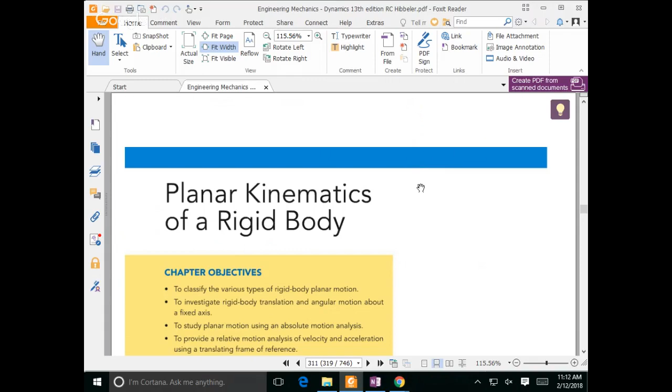But we also had that section a bit ago in the end of the other chapter where it talks about RB, the position of point B, is equal to the position of point B relative to A, plus the position of A. And if you just look at a vector diagram, you see that. You see RA and RB relative to A. This is kind of the focal point right here.

Now, I know it has a weird subscript there, but there's a reason behind that. And the way they've set it up is kind of nice because the subscripts could be canceled out. So this is kind of not necessarily dummy proof, but it's easy to make your way through this. But in addition, something very strange happens to this. The title of this section had the word rigid body involved in it.

And if this little blue object here is a rigid body, I mean most of the time it won't really be a blue object, it'll be something like a connecting rod in a car, like a big piece of metal here, in which this might be A and this might be B, or any sort of object. If it's rigid, then the distance between A and B doesn't change. Hopefully, if it did change, that means your thing broke and you've got a problem. If it didn't, then there's something very interesting you see if you're sitting on A.

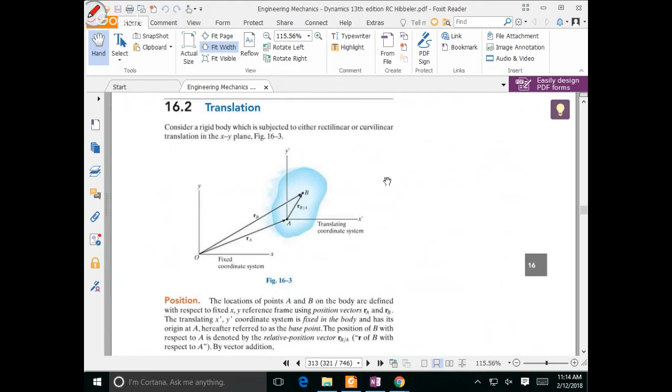So this RB relative to A means, he showed this before, where there's a person sitting on A looking at B. The only thing that person sees is the possibility of either one, it rotating around you, or two, it just sits and goes in what he calls translation. So the object might look like this.

A few seconds later, well, outside of the fact that my drawing looks strange, basically you're sitting here and you're looking at that point, you don't see any change. The only other thing that can happen is you're sitting there looking at it and the thing moved. And from this perspective, it appears as though it's rotating.

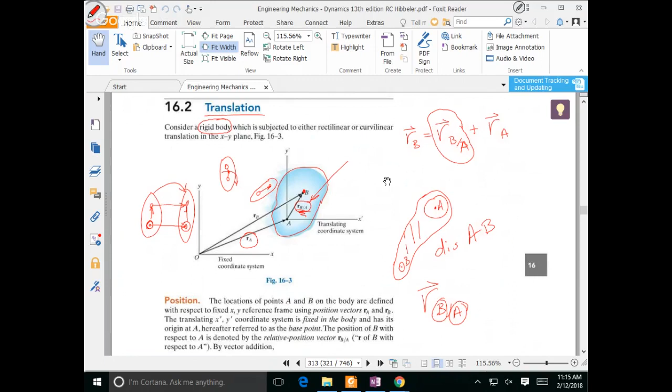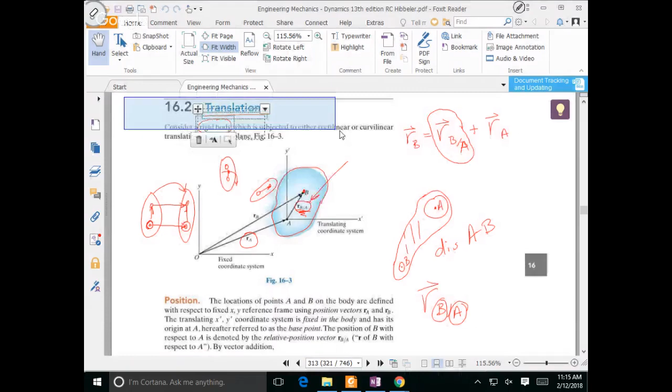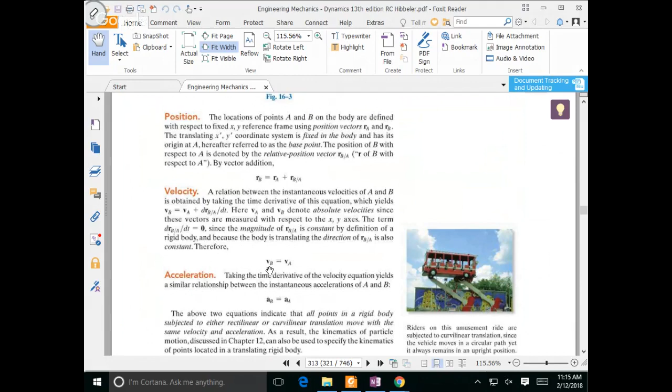And that's it, there's nothing more to it. So it's essentially this concept of translation. He spends a little extra time here, and maybe he shouldn't, but he talks about translation - if it's just purely translating, moving from left to right or right to left, then the velocity and acceleration of each point are the same. There's no difference between them.

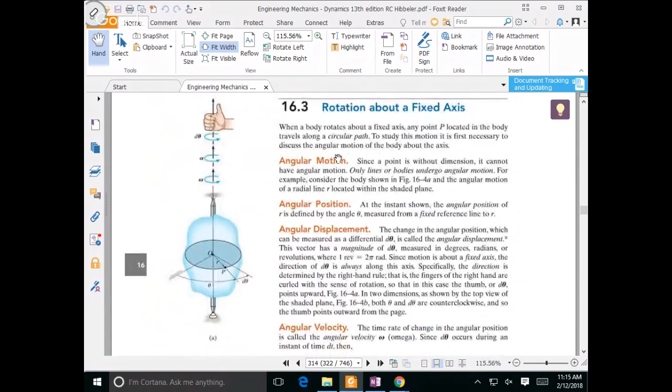However, then he talks about the second thing, and that is rotation about a fixed axis. He sort of diverts your attention a little bit - maybe he shouldn't, but he starts with this, and notice that's the right hand rule, it rotates in that direction. Actually this one should be listed first. The omega is the same thing as theta dot, and the alpha is the same thing as theta double dot. There's no difference between those at all, so absolutely nothing there that's different.

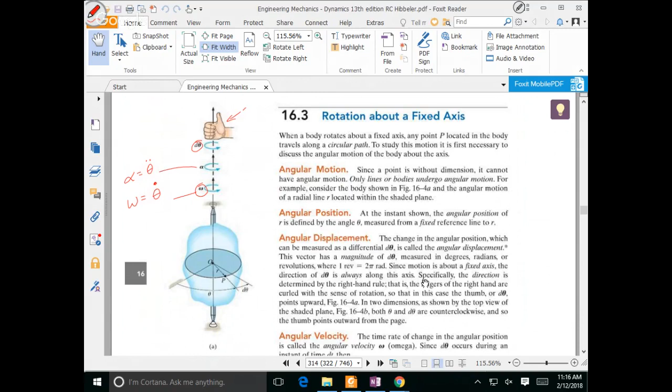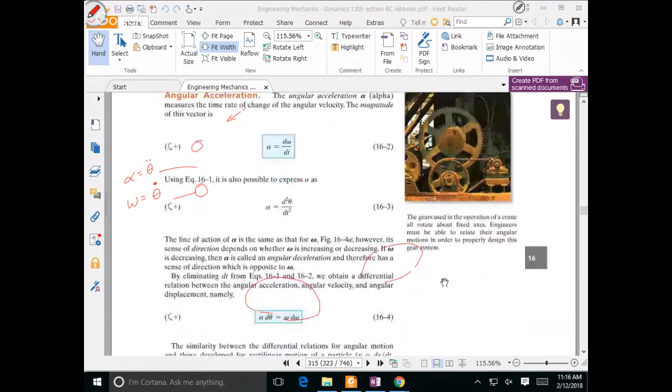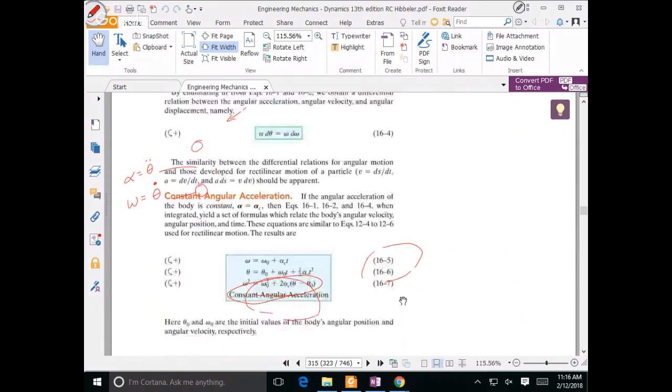You go down and he identifies those, he identifies the other one right over here. Eventually he looks at this other equation, which is rarely used, but he might put a problem in the back of the book using it. Then he starts talking about constant angular acceleration there, and that's kind of a byproduct of stuff you've already seen.

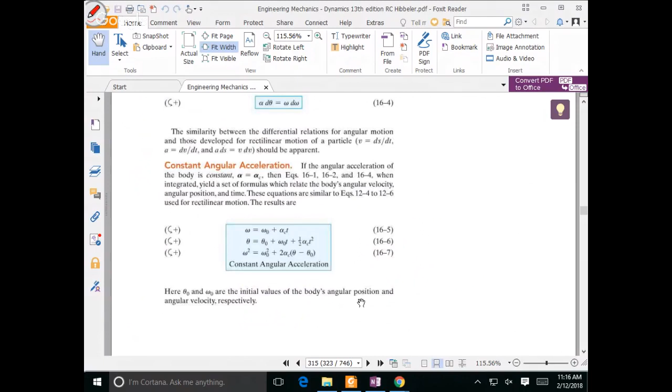You've got to think about it like this, okay? And here, I'll do it this way, just so it's saved in the notes.

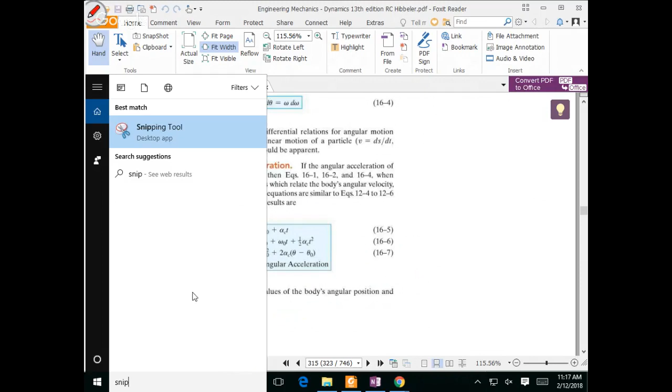See, the problem with that is that now I'm over here doing the lecture and the video is sitting over there. If I had another monitor and I could turn and look at it, that would be a little bit different.

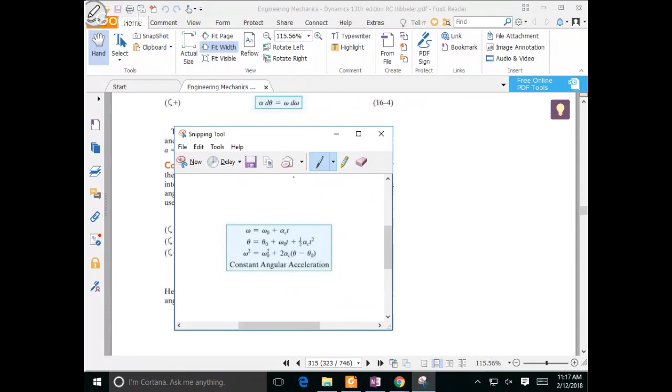If you look at this thing, you've seen this before. He's got this equation - well, before we started with S equal to, here we ended up with this equation. Let me just write it: VT plus the acceleration constant, if it was constant, t squared over 2. And really I should have written the other one first: V is equal to V naught plus acceleration times t. So, in fact, that one looks exactly like that one.

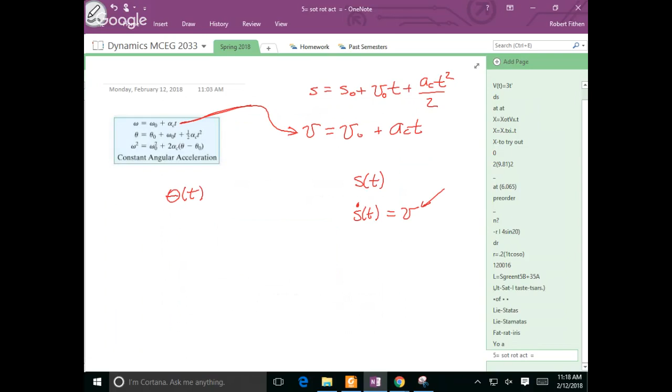So what's being said here is in the old method, you came up with S as a function of time. Over here, theta is a function of time. Then they came up with S dot, which they decided to call V. It sounds ridiculous because you've already done this in physics and you don't even think twice about it. But then they decide over here that we need a new symbol for this because we had one for that, so we'll call it omega, and that'll be in radians per second because that's in radians. Then S double dot is equal to V dot, which is the acceleration, so they come up with a symbol for that too. If you look at these two equations - and I know I have them backwards in that if you compare theta to S and omega to V - you'll see it's exactly the same equation. There's really no difference.

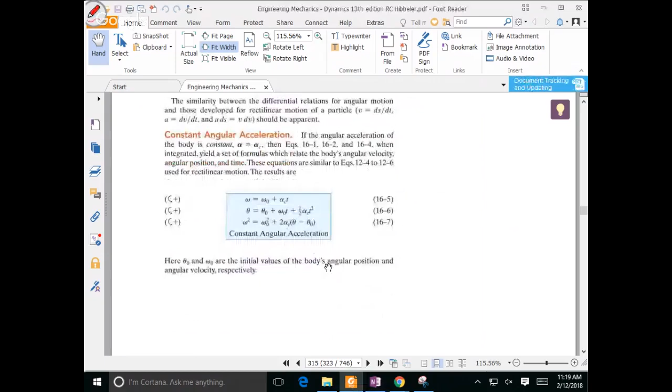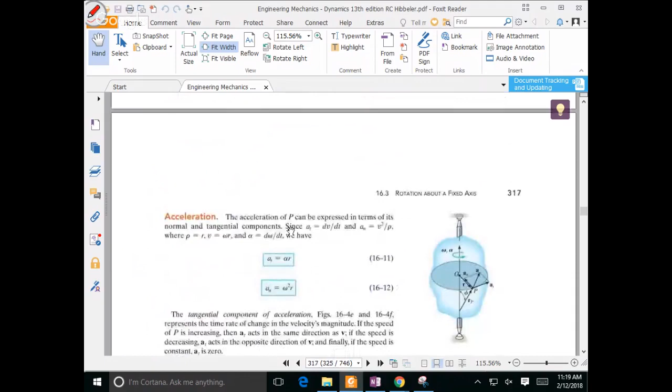So then what he does in the text is he rolls along, and he says, hey, what's the motion of a point? He uses a diagram - okay, well here's one of the diagrams right here. As this blue blob rotates around, you know the velocity is always tangent to the particle path. And if it's a rigid body, it doesn't break apart, so wherever this thing is, it just rotates around in a circle, which means the velocity is tangent to it, basically tangent to the circle.

Now what's interesting, and I'll compare these in a minute, is before we came up with a U-R and a U-theta, and we had those as base vectors. And then we created a polar coordinate system.

What I'll do, I can do this so I can start it twice. Let's see, so I can have two copies of the book open and I won't have to move back and forth. So let me let that come up and we'll go down in a minute.

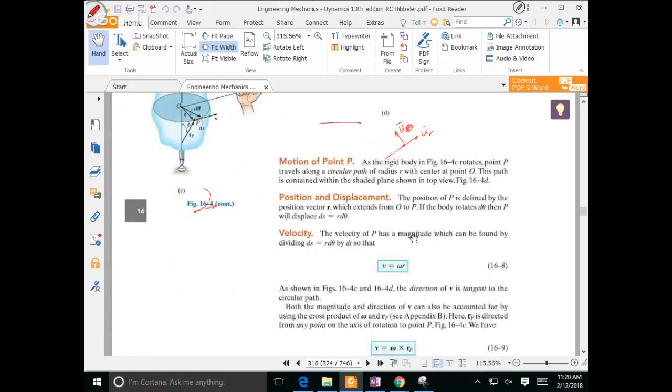So then he comes up and he says, well, the velocity is equal to just omega r. But then he starts breaking it down and says, oh well, see appendix B, there's a vector equation associated with that, and the vector equation looks like this.

Staring at that for a minute makes you think about something. Let me see if I can make heads or tails of this. He says the velocity is equal to omega r, and he just writes that down. Then he says, okay, in fact, there's a velocity vector, which is called omega cross r.

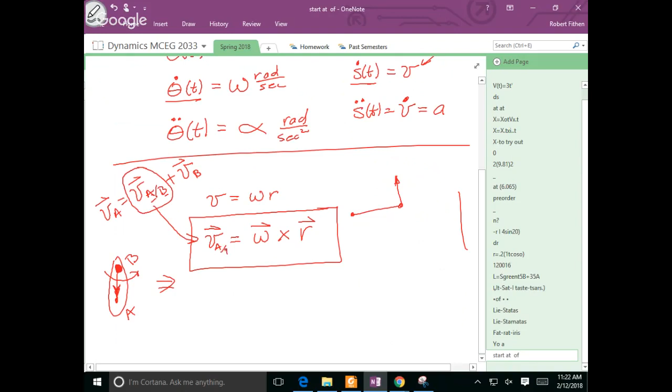Let's hold our mindset on this for a few seconds and go back to: velocity of A is equal to velocity of A relative to B plus velocity of B. If you're sitting on an object floating through space, here's A and here's B, and I'll draw a vector, originating from B and pointing to A. If I'm sitting here at this point, and this thing is rotating as it flies through space, the only thing you see at B is a rotation. So this and that are the same thing. Does that make sense? There's no difference in that equation. Those are exactly the same equation.

Now you still have a velocity of B. So for example, if this thing were rotating and this is velocity of B, then you would add the rotation component to that. And that's where he's going to end up going.

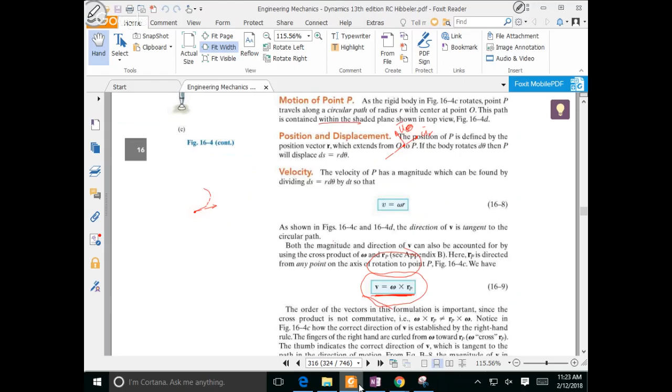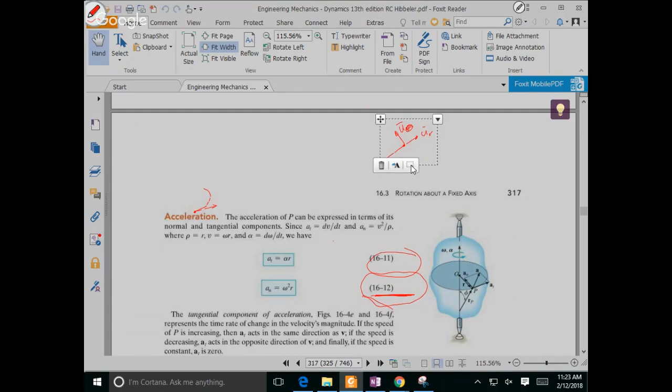He just flops this out on the page, and you're sitting there staring at it thinking, okay, there's a normal and a tangential here. He's got a normal and tangential the same way we did before. The normal points from the point back to the center of rotation. The tangential means the amount you were speeding up. It's like the car: the AT is your gas pedal, the AN is the steering wheel. As you turn the steering wheel to the left, you'll have an acceleration going that way, but if you shove the gas pedal, you're speeding up as you're going around in circles.

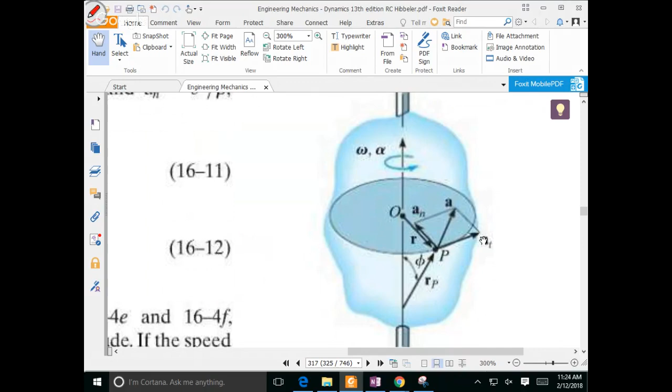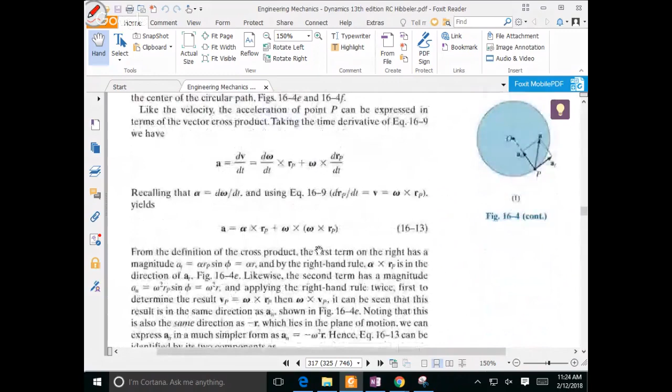So it turns out that he has two new terms: a normal and tangential. Then he flops down an equation. This is the way a lot of textbooks write it, but he writes it like this.

Now what we're going to do is I'm going to try to make heads or tails about this, comparing it to what we've seen before. So he will actually come down and I'll do it: acceleration A relative to B is equal to, looks a lot like the one above.

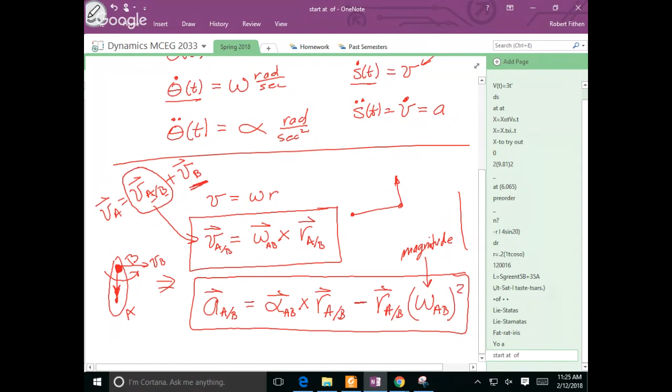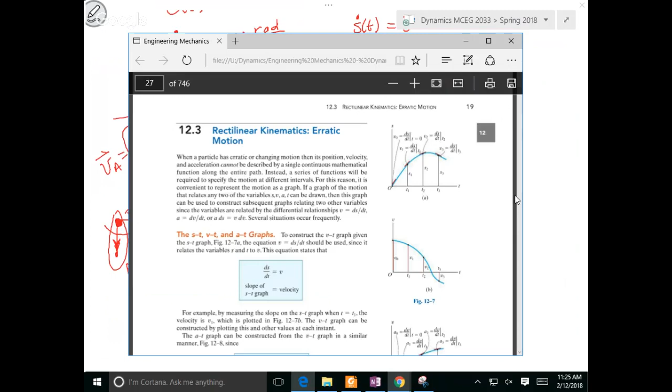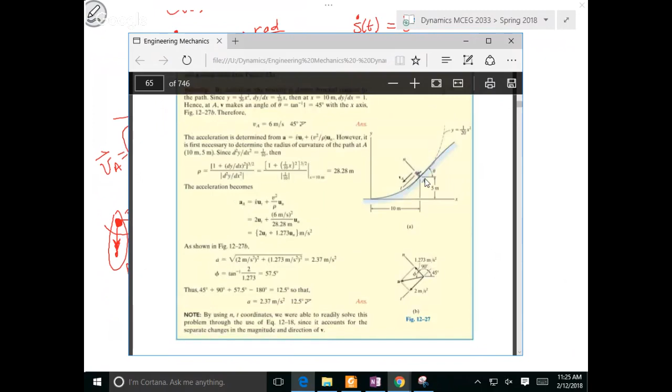And technically, I should write that omega in front of it, and this is squared, so this is the magnitude. Now you've got an equation like this, and you've got an equation like that, and you're staring at it thinking, how can I make heads or tails of any of this? Is there something I've seen before that I can relate this to? That's why I tried to bring this up. Now I've got to make my way through, say maybe right there. Nope, a little bit further. Okay, a little bit further. Okay, I'm getting close, getting close.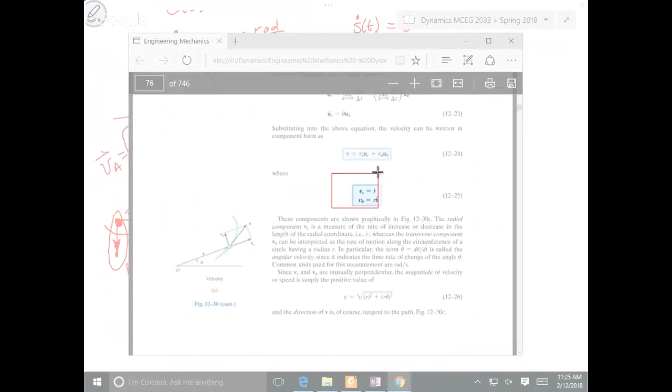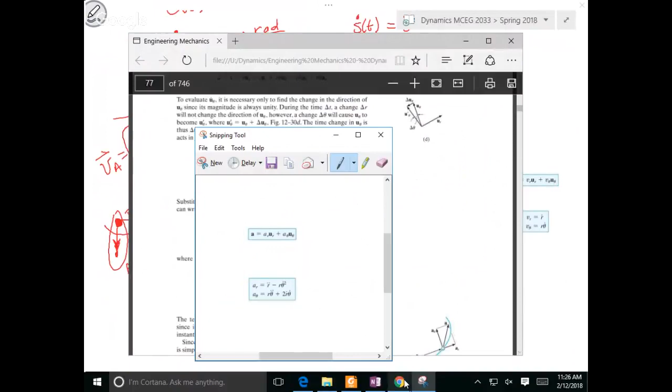So instead of me writing it down, I'm going to grab the equation like this one, using the Snipping Tool. I'm going to grab this equation and drop it right there. Then I'm going to go over and get the acceleration, which is right here, and copy it. Oops, wrong place. I'm going to drop it right there. So from polar coordinates, if I grab this and put them together, polar coordinates say this.

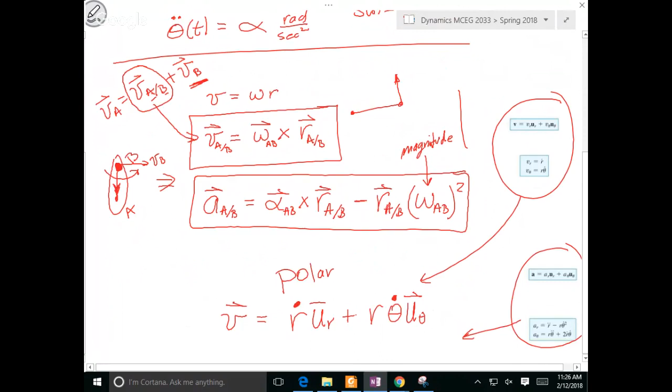That the velocity vector is equal to r dot u_r plus r theta dot u_theta. And then the acceleration says this. Let me move down a little bit. Acceleration looks like this, okay, this will take me a minute: r double dot minus r theta dot squared, u_r plus r theta double dot plus 2 r dot theta dot, u_theta. Now let's put this in context.

Polar coordinates: here's U-R, here's U-theta, the base vectors, and there's R. In the case of polar coordinates, R could be a function of time, it could change. Now if you compare this to the other system, there's one overwhelming difference: unless the object breaks...

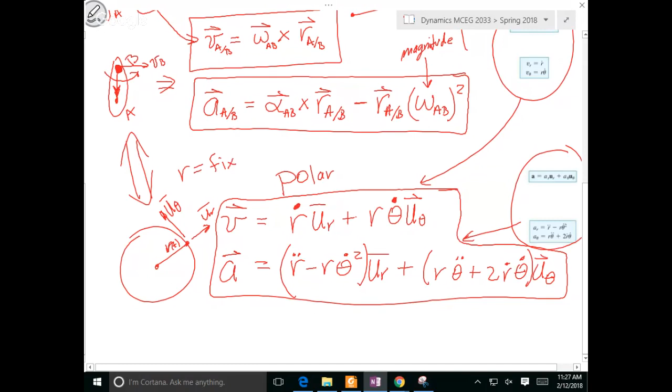Let's rewrite them. The velocity equals R dot's gone, so all you get is R theta dot U theta. For the acceleration, that first term goes away, and this term goes away too. So all you get is minus R theta dot squared U-R, plus R theta double dot U theta.

Now this is if R doesn't change. I wrote this so big, now I'll shrink it down and compare things here. So let's look at this term first.

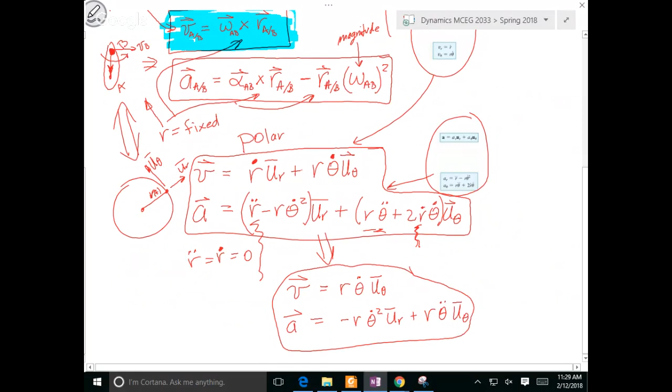That term is just omega times R, which if you look at it, is the same thing - there's no difference between those. The difference is in the implementation, how you determine the actual value. Actually, I think this is easier to do up here than with polar coordinates, and I'll show you a case in point in a minute.

Now compare this one - take a look at this term first, then that term, and what you'll see is those are in fact the same terms. This term and that term are the same thing. And the R, this is the R, here's the R, and this is the theta double dot, which we've already figured out is the alpha. So those are actually the same thing.

These are kind of a subset of polar coordinates written in vector form, which means you can choose polar coordinates if you want to, but you do not have to.

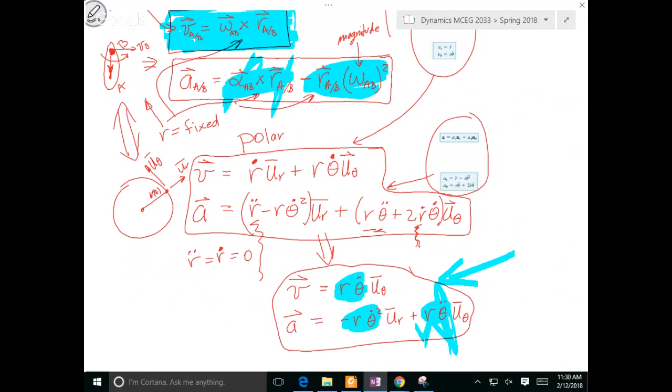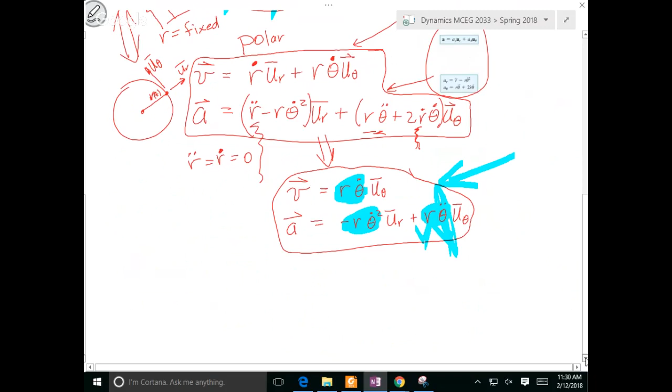Before I go any further, let me give you a case in point. I have an object sitting up here - I'll say for the moment this thing is attached to the ground, and this thing is swinging around, and you could say theta dot, or you could say omega, is equal to 2 radians per second.

Now, I can put all sorts of angles on here if I want, but let's say I don't want to do that. Let's call this point A and this point B. To do it both ways, I'll make the coordinates of B be X equal to 4 and Y equal to 3. Therefore this vector is length... 5.

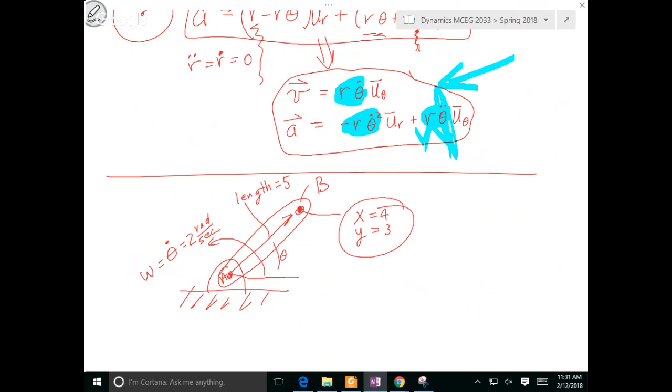Now I'm going to find the velocity first. If you're doing polar coordinates, and R doesn't change, I can grab it right there: velocity equals R theta dot U theta, which I've got to figure out, equal to 5 times 2, a value of 10. But that's not the complete story - you've got 10, and it's in this direction.

And unfortunately - oh, I know how I can do it, let's do it like this, move that over to the side. Well, unfortunately this is my U theta here. So there's my U theta, I know that direction. Let's do it in this other way.

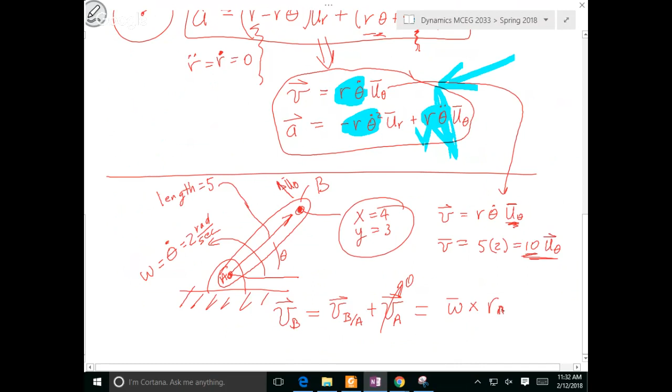The velocity of B relative to A. Now, if I want to know the velocity of B, I already know the velocity of A - it's gone. This equation is telling me it's omega cross R, B relative to A. Now, if I just... here's where you've got to start using your right-hand rule. What is omega and what is the other, the R B to A?

I do it this way because I like to do things in a regimented way, always the same, so I don't have to think a lot. In the book he does something different, which we'll talk about in a minute. But if I put omega in there, this is something you have to be very careful of - a physicist is very meticulous about this. A rotation: right hand, stick your hand on X, rotate it to Y - this rotation is positive, so this is positive omega.

It turns out it's 0, 0, and 2, because I was given the 2 right there. So technically the vector should be 2k. Does that make sense?

That's something you have to get used to. When there's a moment or a twist or a movement in angular, you use your right hand and your thumb points in that direction. So in a plane, if I took this and twisted it, the twist would be in that direction. It doesn't make sense, but that's how they classify this. Or maybe it does make sense. It makes sense to me because I've done it so often I don't question it anymore.

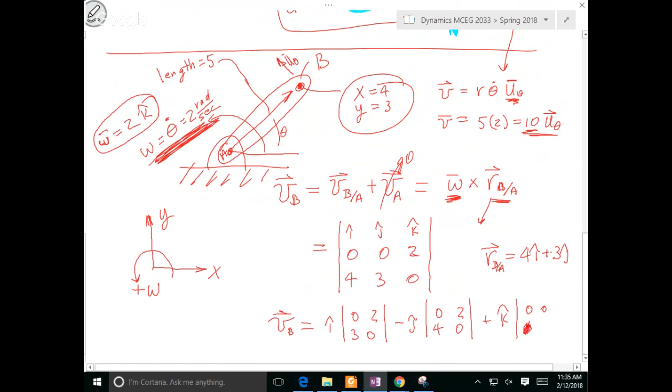Then I break it down like this. What's that called? Cofactor expansion. You could do it that way. 0, 2, 3, nothing. Minus, because you're taking the second one. 0, 2, 4, nothing. And then plus K. And by the way, there won't be a K, because you always get a 0, 0, and I don't care what you get there, and I don't care what you get there, because the 0, 0 will cancel it out.

So what you end up with is the velocity of B is equal to 0 times 0 minus 6I plus 8J. Did I do that right?

Now let's see if this makes sense. I'm going to redraw this thing. It sits here about like that. It says I go backwards, value of 6, and then I go up, maybe a little higher, value of 8. I cross this, and it should be in the right direction. Now the question is, this shows the magnitude of that thing is supposed to be 10.

Let's check that out. So is the square root of 6 squared plus 8 squared, 36? What's 8 squared? Yeah, so that'd give you 10. So it equals square root of 100, or the magnitude of this thing is 10. So the magnitude's 10.

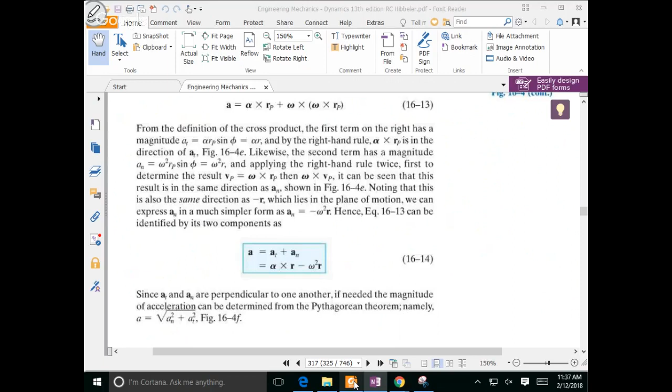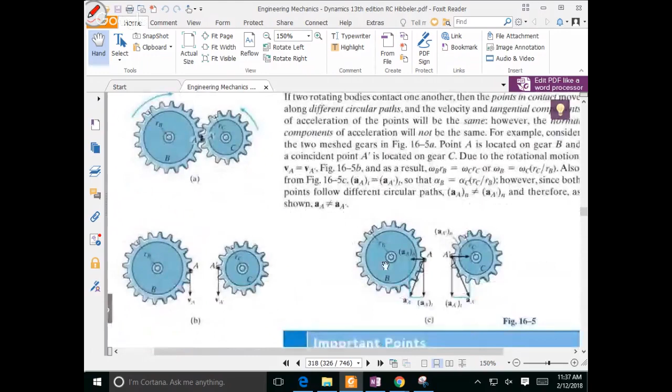That's where he's going to. I don't know how long it takes him to get there in the book. So he starts here, and it turns out the acceleration does the same thing, but we'll get there in a second. So he goes on, and then he just starts working problems. So he works problems and works problems, and then maybe he has more problems.

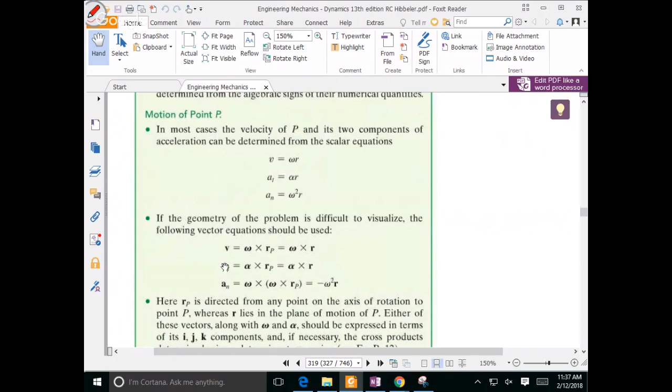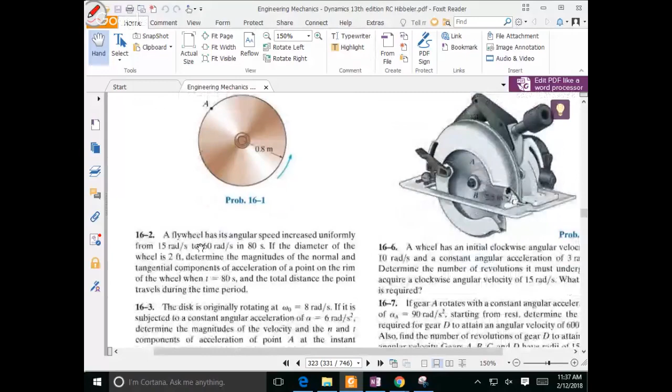He lists the equations out there, and he breaks them apart, tangential and normal. I keep them all together. So then he's working problems. He doesn't go anywhere, he just starts working problems. So maybe we should join him, although before we join him, let me make sure we kind of understand that's where we're going.

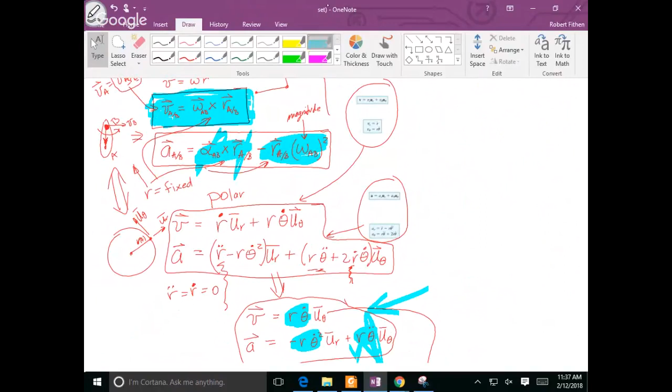The most important part out of here that you're going to see later is this equation gets repeated over and over and over, as well as the velocity equation. But this way, by looking back at what you saw previously, you realize that what you're doing is just saying in a rigid body situation, the 2 points don't move away or towards each other.

So the polar coordinate system breaks down to something like this. And in fact, this and these two, well, yeah, this one is appropriately, the velocity is equivalent to the velocity, and the acceleration is equivalent to the acceleration. So in fact, you've seen this before.

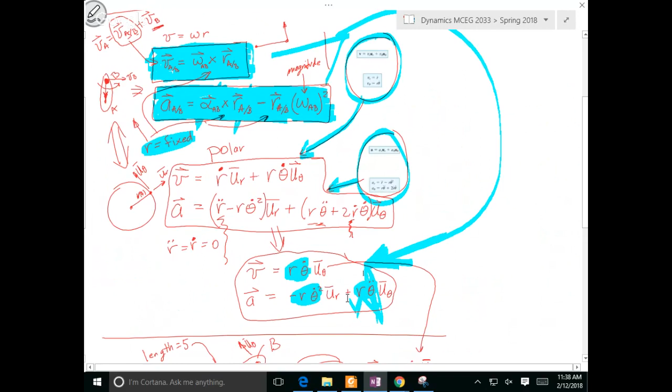Let's go work a problem or two. I said that homework set 3 is in chapter 16, and it didn't have numbers associated with it, problem numbers. So I'm going to go back and change that set so that it has the numbers, so you can look up the answers without too much hassle.

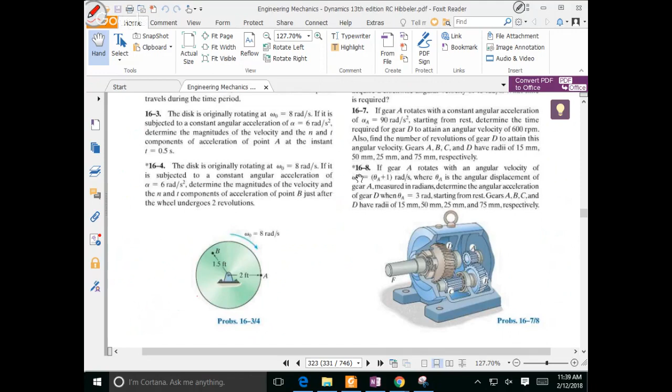So here, let's just pick one. Let's see. Well, he doesn't have any. Oh, yeah, he does, okay. So here, the gear rotates 20 revolutions. It achieves an angular velocity that, starting from rest.

Okay, now this is just: starts from rest, determine the constant angular acceleration and the time required. This is dumb, but anyway, I'll do it. See, that's what I get. I usually am not.

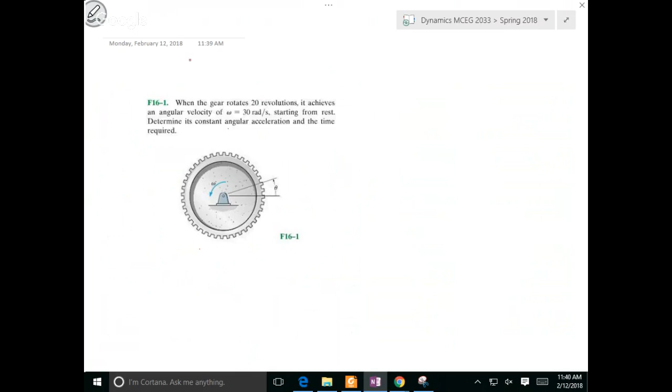Okay, let's add a page and do this one. It rotates 20 revolutions. Well, if he's saying it's constant acceleration, I guess we could do this. Let me just write the equations. I'll go back and determine what it is I'm going to deal with.

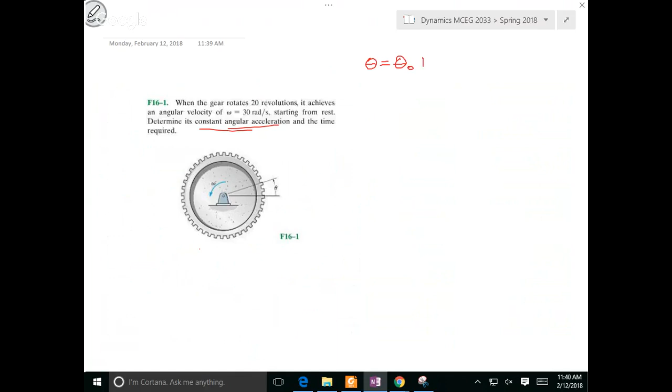Plus what goes here. Is it omega t? What goes here? Is it alpha and then t squared over 2, right? And of course he gave us that. Now if I wanted to go, I could do this. Omega naught, plus alpha t. So I got those two equations.

So he says it went through 20 revolutions, and then there's 2 pi radians every revolution. And he said, did it start from rest? I hope so. So if it started from rest, that goes away.

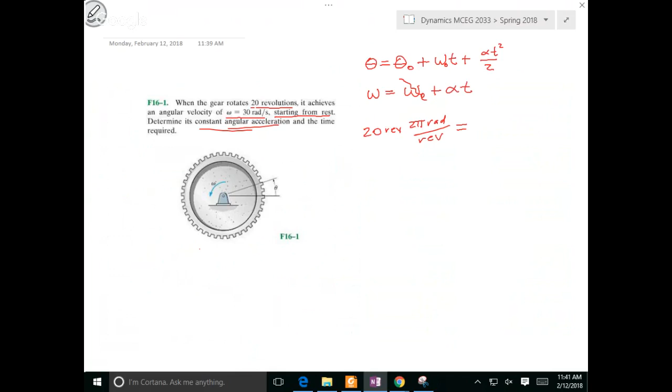Okay, so now I'm going to assume it achieves angular velocity. I'm going to assume this one's gone away. So now I've got this: theta is equal to omega naught t. Well, if it starts at 30, what is omega naught? I mean, if he says you have a constant angular acceleration...

So he said it achieves an angular velocity of that. He should say, I'm going to assume that it reached that at 20 or whatever this number is, 40 pi? So at 40 pi, it equaled that, right?

Wait a minute. Yeah, but wait a minute. I should. He said it started at rest, which meant, and I'm assuming it started there. I reached. But if you assume that's gone, wait a minute. If it starts from rest, wait a minute, I forgot my other term. Sorry about that. So you're at that, you have no... Okay, so I wrote that down. Why did I not write this other part?

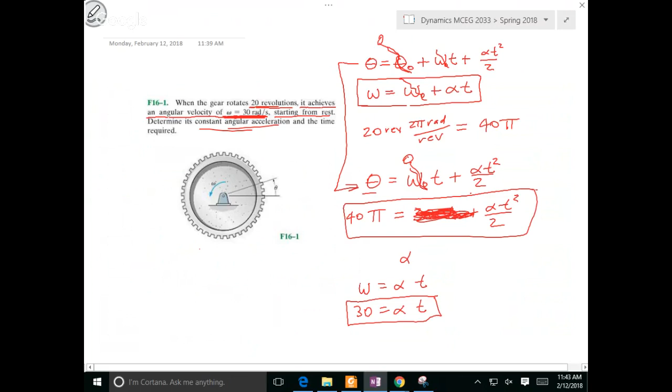That's wrong. Plus alpha t squared over 2. So alpha. So then the question is, what else do I have left? Now I've got omega is equal to alpha t. So that shouldn't be there, but this should be 30 is equal to alpha t. And that. So I got this one. This is just superly annoying. I got that one and that one. And I don't know alpha and I don't know t.

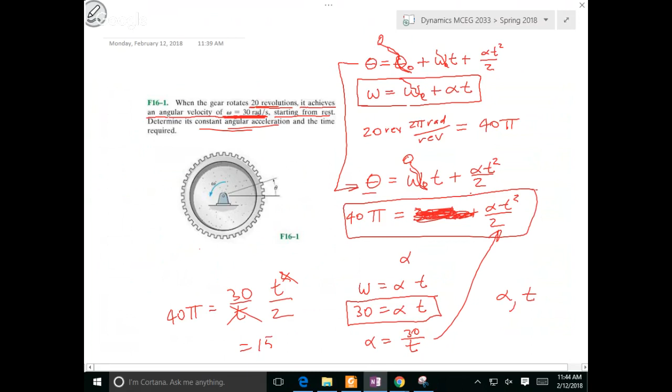So which one would you want to do? Would you want to solve for t, or would you want to solve for alpha? If I did alpha is equal to 30 over t and shove that back in there, I get 40 pi equal to, put an alpha in there, I get 30 over t, t squared over 2. Did I do that right? Do what now? And then 15, now I don't know what that number is. I can't go down. Okay, so that's 15t is equal to 40 pi.

I don't know, t is equal to 40. I thought that maybe it would be like an integer, but I guess I'm expecting too much. Wait a minute. Okay, well, I guess I'll do this. Do command line. Oh, good. Okay, let's see who wins.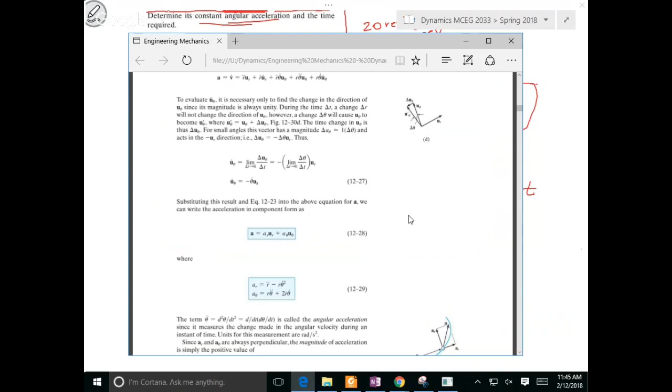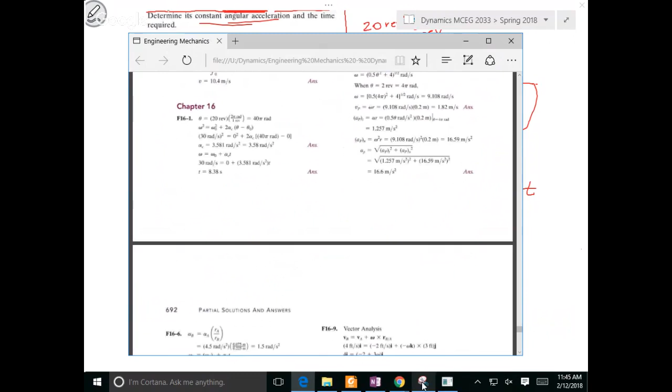8.37 or 8.4. How about 8.4? Luckily I have this one up. If I swim to the back of the book... oops. I don't even know what problem I just did. Was it? Okay, so I did it backwards, but I got 8.38. That's what he got. Okay, so I think that's what I got, 8.38. Yeah, so 8.4. And then you go in, and I guess you're trying to find alpha.

So then you just take this thing: alpha is equal to 30 over 8.38. So I'm just going to assume I get the same answer.

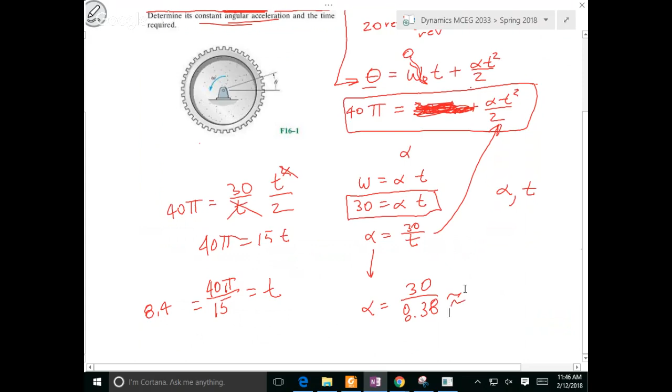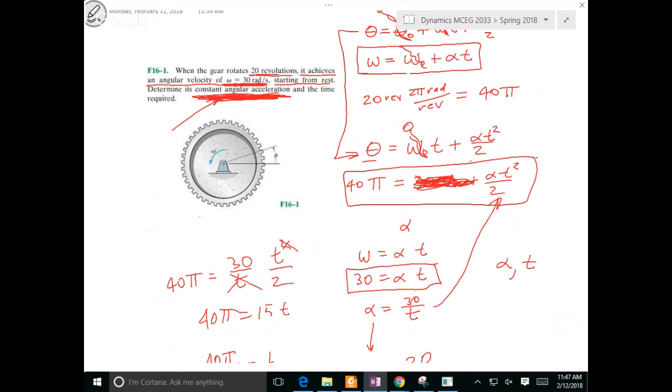That's a dumb problem, but it's working off the concept of constant angular acceleration. And at first glance that might not make good sense, until you realize, just like a force, if you flip the switch on an electric motor or something like that, usually, not always, but usually it'll try to supply a constant torque to it. And so that constant torque, given that the rotational inertia is constant, it'll produce a constant angular acceleration.